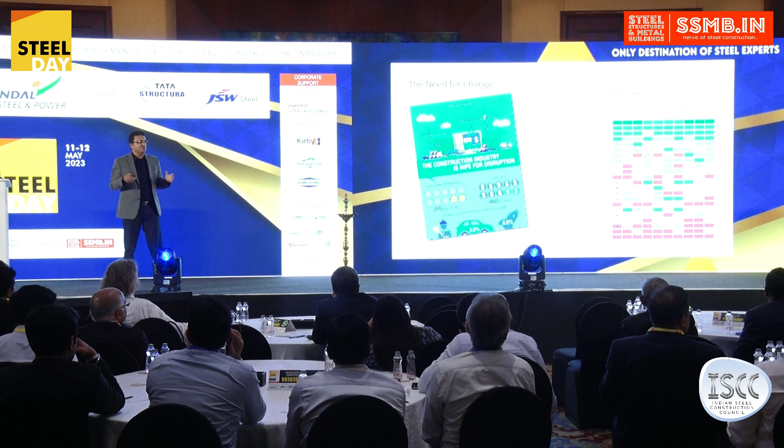So I wanted to quickly take a look at what we are doing as an AEC industry in construction and in design. All right, so this graph on the right-hand side shows various different industries and how digitally ready they are, right? If you see the IT sector and media and professional services, they are all on top. Green means you're kind of digitally ready, and red means you're not there. Orange is like, you're kind of getting there.

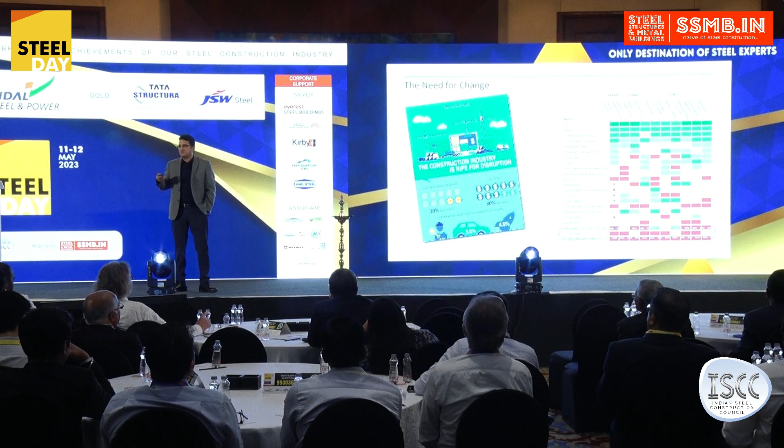This is from a few years ago, but if you see construction, it's second from the bottom. And the only thing below it is agriculture. And we know that some of these things have moved up. I know construction is also kind of moving up, like was mentioned. There's some things coming up. But there's a long, long way to go before we can think of ourselves as an AEC industry that is using technology as and when it should be used.

McKinsey had come up with a report, which on the left-hand side you'll see, that most of the projects typically take 20% more time to finish, and on about 80% of projects, I think, the budgets are busted. So there is a need for that, and the construction industry is ripe for disruption. And we've started moving in that direction, I think.

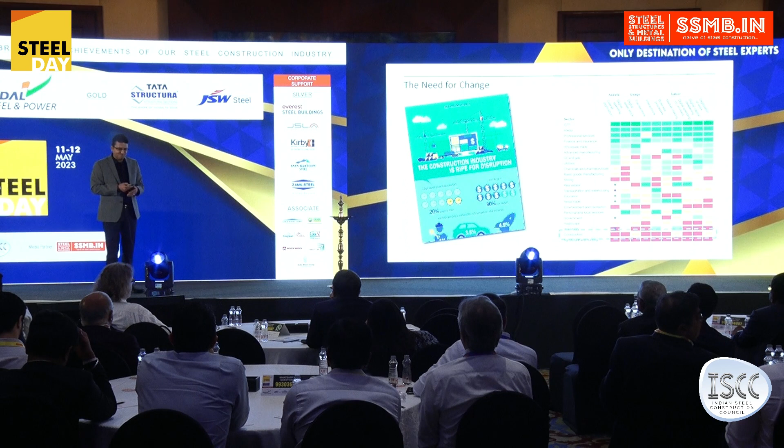This is a very interesting slide from the future of construction, put together by the Boston Consulting Group. There's a lot of things here that somewhere or the other we have started doing world over, maybe not everything in India yet: prefabrication, advanced building materials that we just heard about, 3D printing and additive manufacturing, autonomous construction, AR and VR that's being used more and more, big data, predictive analytics, wireless monitoring, connected equipment, cloud and real-time collaboration, and building information modeling.

So there's a lot happening here, but when it comes down to it, all of that depends on data. And data is where we, as design professionals, can bring value. If we don't have our data right, if we don't have our models correct, none of these other things could work. There's a lot of dependency on what we do. So I think the time is right to rethink how we design and deliver projects, and that's what I'm going to talk about today just a little bit. Being an engineer, I'm going to focus on the design aspect of it. We'll talk about construction a little bit later in the panel today as well.

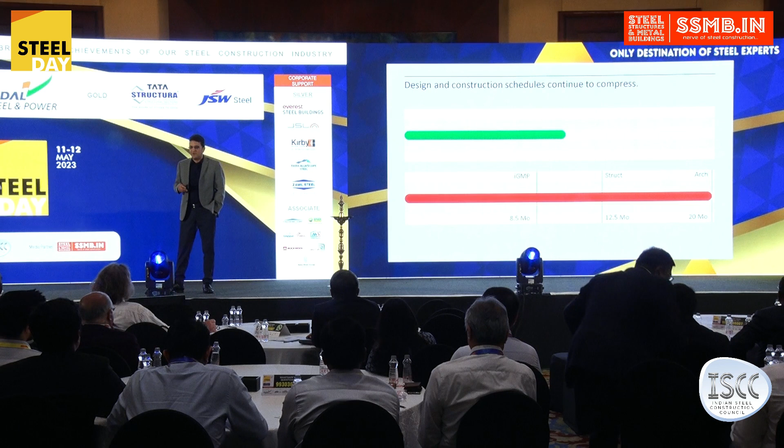Okay, so what is the need for it? These are two similar projects, very similar kinds of structures. These are stadium projects, both in the US. One had a design time of 20 months, and the other one half of that, right? This is just over a period of 5 or 6 years, and this is the kind of transformation that we are seeing world over. So what do we do in this case? If we have just half of the time, how do you deliver that project?

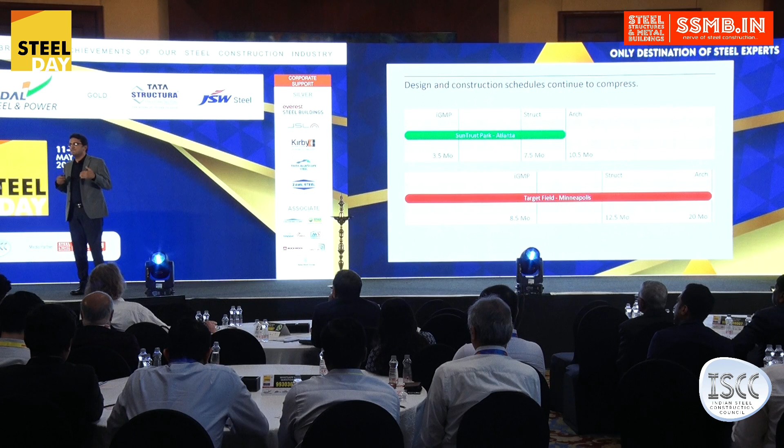So there's two ways that we can take, right? We can just do less stuff. We can give less information. We can have contractors figure it out or delegate it down the line. That's one way of doing it. But we would rather take on the responsibility and use data-centric modeling to take on additional responsibilities so that the risk is less. And that's what is supposed to happen.

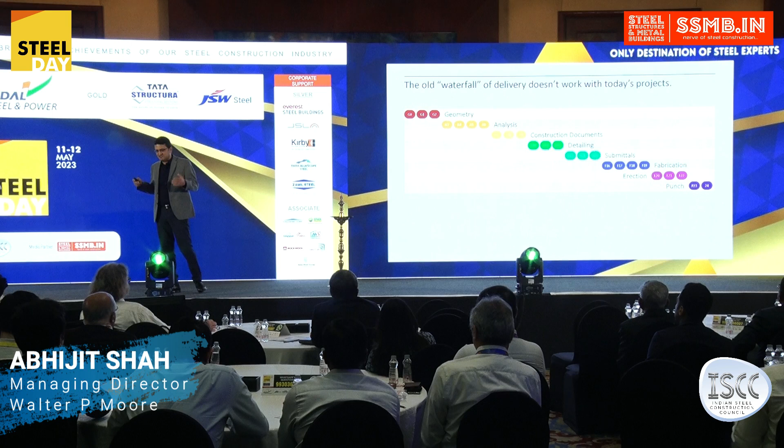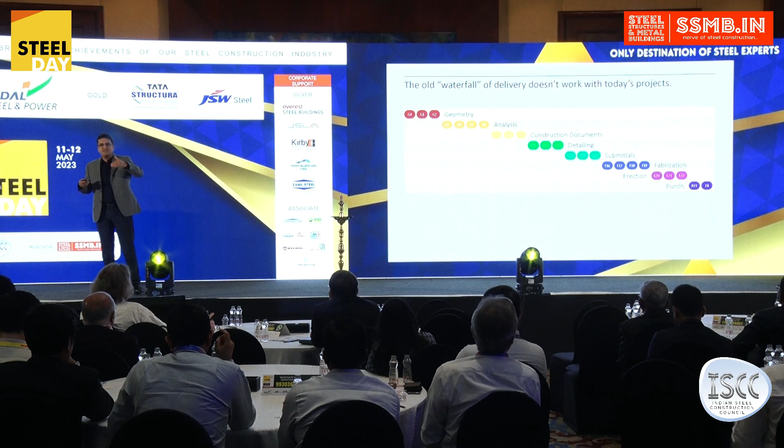So now we know the old waterfall way of delivering structure doesn't work with fast-track projects and where we are headed. Geometry being the first step, then analysis, construction documents, detailing, then the submittals or shop drawings, fabrication, erection, punching. That one-after-the-other approach doesn't work anymore, because all that leads to is an inefficient relay race, right? As design consultants, architects and engineers, we work in this one green box where we are doing our coordinated design.

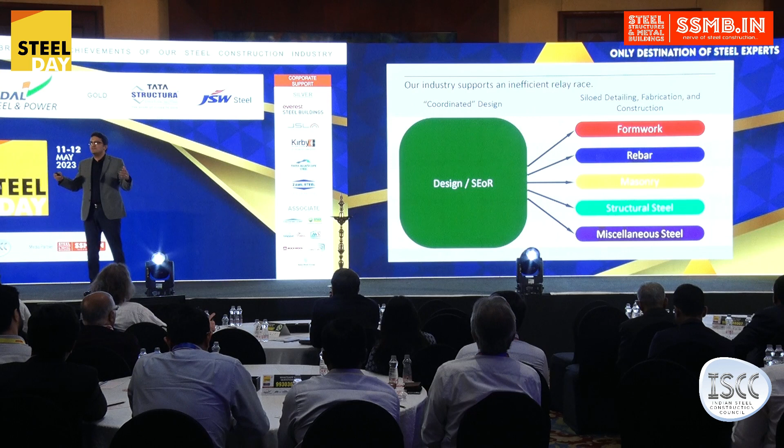And then when it goes into construction, we have all these other silos, like the formwork contractor, the rebar, masonry, steel contractors. They're all working in their own thing. And this is not even talking about MEP. So everybody is working in their own little silo, and the first time they come together is on the field when things don't match.

So that's why this digital approach or digital practice or data-centric processes are required. And there's a few different things: what is the need for that? So as was mentioned earlier, things are getting complicated, right? To address this complexity, there's more things that we need to evaluate in more depth. So optioneering is something that we have to do more and more.

To reduce waste, sustainability, I think the more optimized the designs are, the more we are reducing waste. Unleash creativity, give more control to ourselves, provide higher levels of fidelity and quality, and deliver consistently. It's not doing just something on one project. So these are the kind of things that require this thing called digital practice.

But what is digital practice, right? So we asked these questions to ourselves, what is digital practice? So the answer that we came up with within our firm was, it's a firm-wide approach to leveraging information using technology, helping our creative personalities turn knowledge, experience, and innovation into value. I know it's a mouthful, big definition.

But actually, when you look at it, a lot of these things are not important. If you take all the fluff out of it, what remains is it's just leveraging information using technology. And that's the critical part if we want to move into the next phase where all the other industries are already there. But more importantly, what digital practice is not, and this is where we all need to be careful. So it's not just blind application of tools.

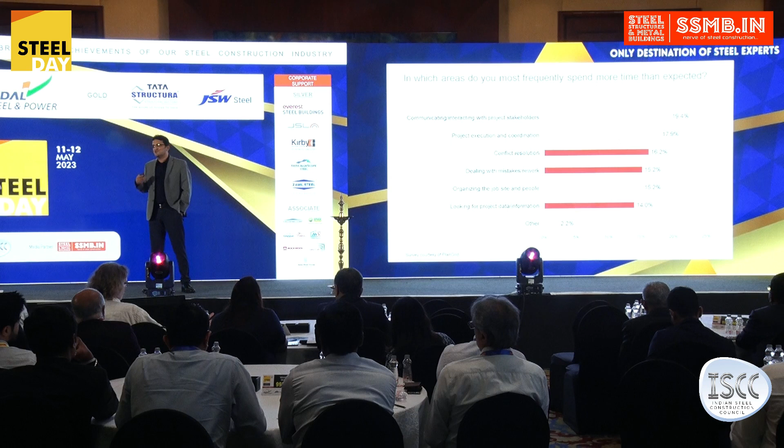So this should not be acceptable. Contractors shouldn't have to look for data, which is something that we should be providing, right? So the big question is, the contractor needs 100% of information to build a project. How much information are we providing as design professionals? So this is a question we can ask ourselves. And the answer, I think, ranges anywhere from 40 to 60% of the information. There's a lot of stuff that's still not being provided directly.

So if you look at it from this standpoint, if the information provided at concept design is, let's call it 0%, versus construction documents, hopefully everything is provided. But what happens is, when we do a 2D drawing handoff, there's a big cliff. There's a knowledge gap that happens there where all the information that is required from a contractor standpoint to bid the project correctly is not provided.

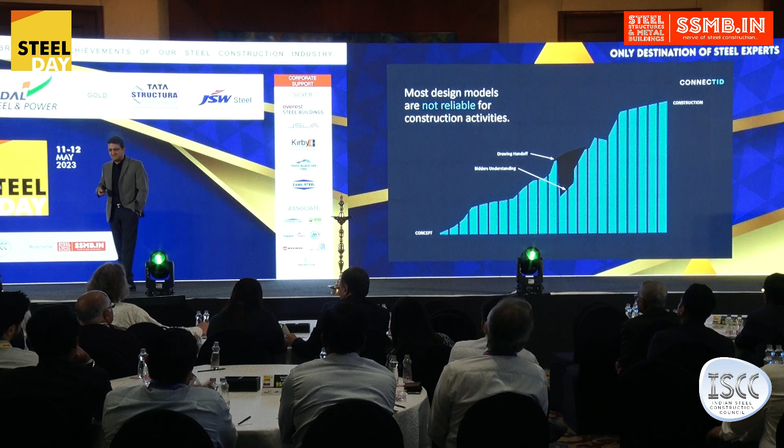So there's a big bidder understanding gap. It drops the information, then you have to go back, maybe ask for additional information or make assumptions, and that's why it increases the time and cost of projects. So how do we take care of this loss of data and knowledge?

So okay, I'm saying not giving 2D drawings. So can we do BIM? Yeah, but what are we actually doing when we say building information modeling? If it's LOD, or level of detail, at 100, basically you're just doing the space reservation.

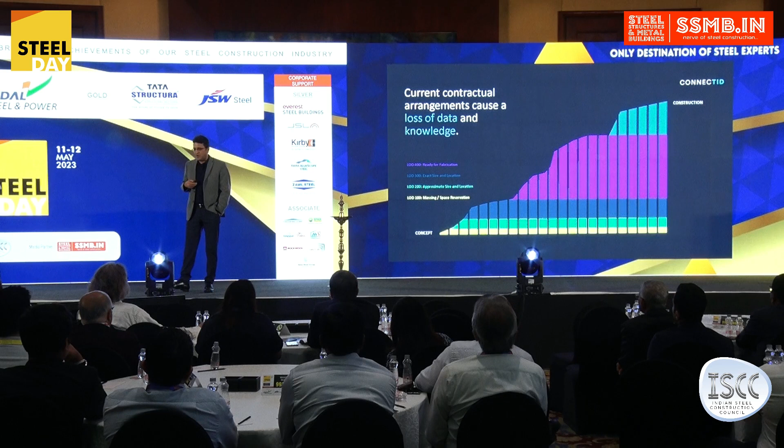LOD 200 is the approximate size and location, things like that. LOD 300 is the exact size and location. Okay, now we are getting somewhere. So that's the kind of information that will help the contractor. But the LOD 400, which is kind of a ready-to-fabricate model, is what is actually required. And LOD 500 is kind of the as-built. But at least providing that LOD 400 is what is required.

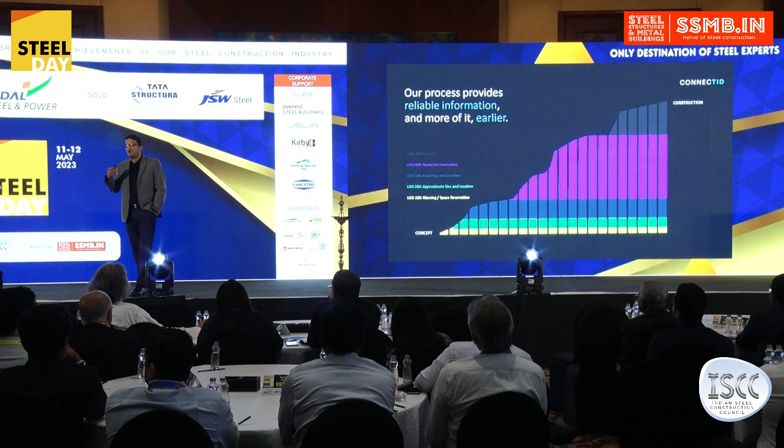And if you provide this information reliably and on time or before time, that's when there is no gap between the understanding of the bidder and the model handoff. And that's what I think our goal should be. So we looked at the traditional approach earlier, right, where the design is done, and then comes the detailing and construction services with RFIs and things like that. And then that's the completion of your design phase.

But what we are looking into with this data-centric approach is something that we are calling CONNECTID. So that's transformative integrated delivery. We say it's something internal, but a lot of the leading engineering companies have their version of this. So the design happens, and then there's an overlap phase where modeling and validation happens. And there is overlap between the two. And what that does is it's definitely leading into schedule savings.

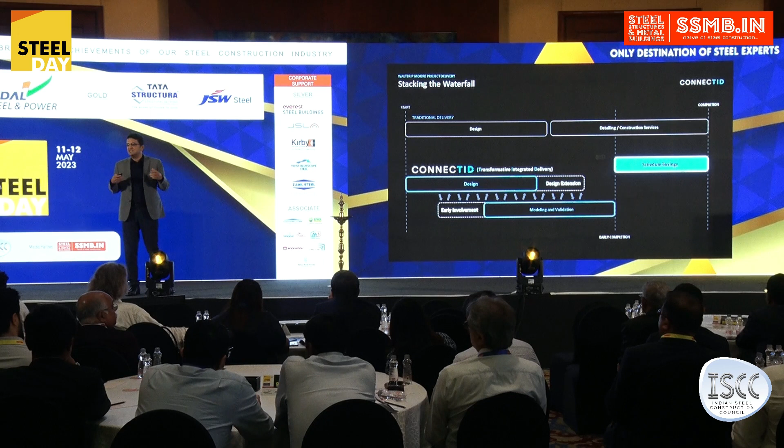Now you would say, okay, now you're actually cutting down on the design time, but there could be a design extension because this deadline is not going to move. And getting the modeling and the construction engineers who are doing the erection analysis and all those folks involved early on, there could be a lot more give and take of knowledge sharing between these two phases. And this is not drawings, these are models. So models can be created early, even a Tekla model created at a schematic design phase if we are using the data correctly. And that's what the goal is.

All right, so talking about models, we know in the project there's a lot of models, right? These are manually generated models prepared by different folks within the life cycle. There could be a parametric model used for defining the geometry, designed by architectural or engineering designers. There's an engineering model, could be SAP or ETABS, done by the engineers. There's a Revit model, maybe some draftsmen in the office putting it together, and there's a fabrication model like a Tekla model which steel detailers are putting together. But these are created in their own little silos independently.

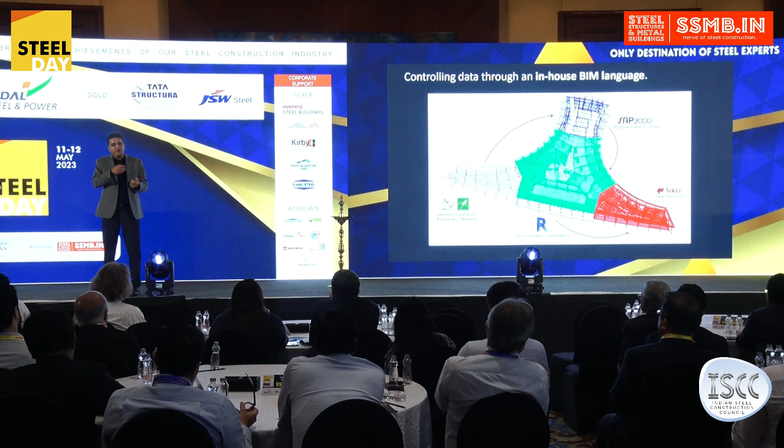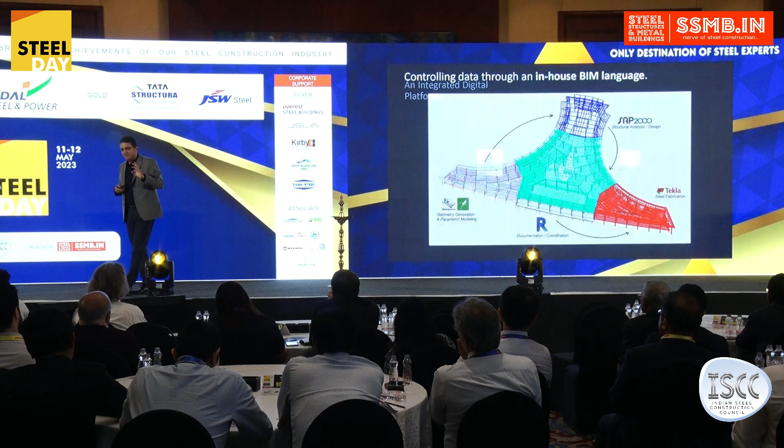I know there's tools that will transform from Revit to Tekla, Tekla to Revit, and so on. But what we are missing is there's so many other platforms that this information needs to go in. So if we look at Revit and Tekla, there's only two connectors. We have to be able to go from Revit to Tekla and Tekla back to Revit. Okay, that's good. But now you add the engineering models like SAP and ETABS, and now you need two more connectors for the information to go from SAP to ETABS, ETABS to SAP. Now you also want them connected to your Revit and Tekla model, so you need 12 connectors. Okay, that's still manageable, doable.

But now you add other stuff like geometric modeling, your Rhino and Grasshopper, your Navisworks, your Power BI tools, GSA, design fabric. So there's so many things happening. And now you have all this mesh of how the data needs to go from one place to other, right? And now you'll almost need an entire IT team just to manage your data on a project. So that's not ideal.

So what we've been doing is something called CID, and this is not the CID we are thinking about. Daya Tod Darwaza, not that CID.

This is Central Interoperability Database, right? So this is basically data which can be exchanged between all different kinds of models. And so everything is finally connected. And these connections are what help us actually go where we want to go, a data-centric process. You don't have to do the same thing over and over again. You don't have to go back and change your engineering model because the architect has changed something.

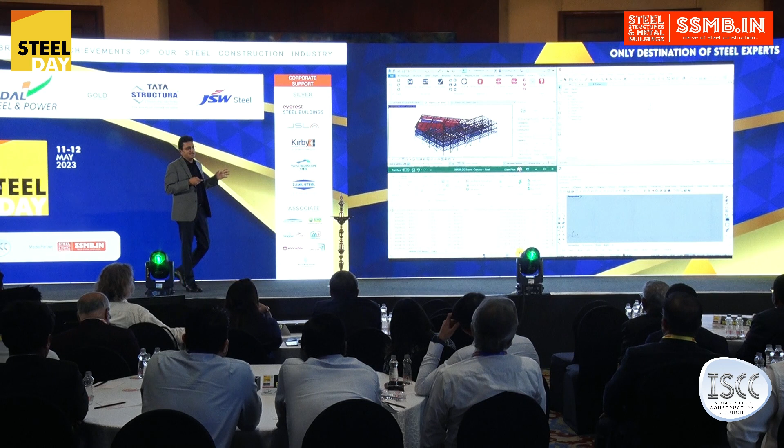So this is a small video of how this can work, and I don't think we have enough time, but basically, if you have a Revit model on your top left, you can get the information in this SID, it could be as simple as an Excel spreadsheet, and this information comes in. Now you can go into Grasshopper and Rhino, write your programs to get this information, make geometric changes if and as required, and then that moves into your ETABS model.

The ETABS model or SAP models or whatever your engineering models are, they design it, go back to your Revit and Tekla models and all those things get updated. So one thing here is this SID or any of these databases are not black boxes. They are open to all engineers so that data can be queried and reported in different ways, so it can be actually useful and not just doing cool stuff for the sake of doing it. So I'm gonna move on.

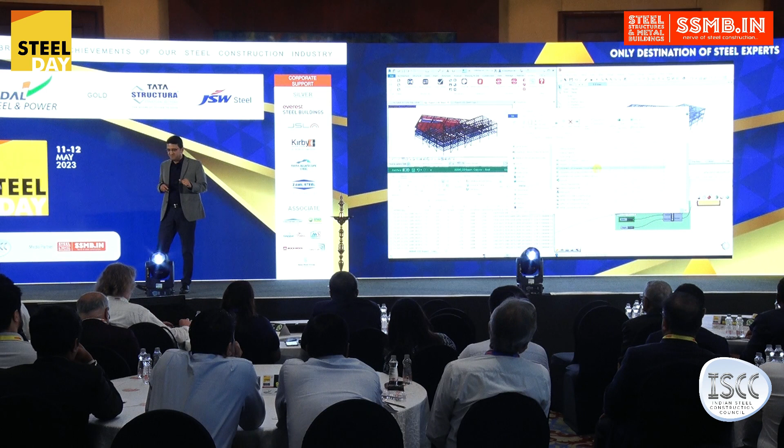What these SID exports can also do is give you a snapshot to track quantities and what was happening at different stages of the project, how the quantity changes or reduces, whatever the case may be. And the other important aspect obviously is sustainability. Are we able to leverage this information, this data, so that we are able to be more sustainable? Are we able to do that?

So what we can also do, since we have really good quantities, if you add in the right factors, we can actually come up with the embodied carbon, not only overall on the project, not only just concrete and steel, but different grades of concrete, different types of steel, your rolled sections, your tubes, your deck, how much carbon is consumed in all these different things. And this, to me, is really important.

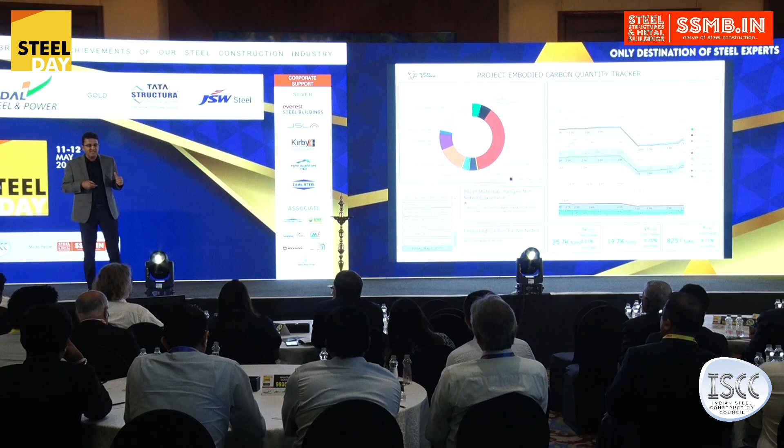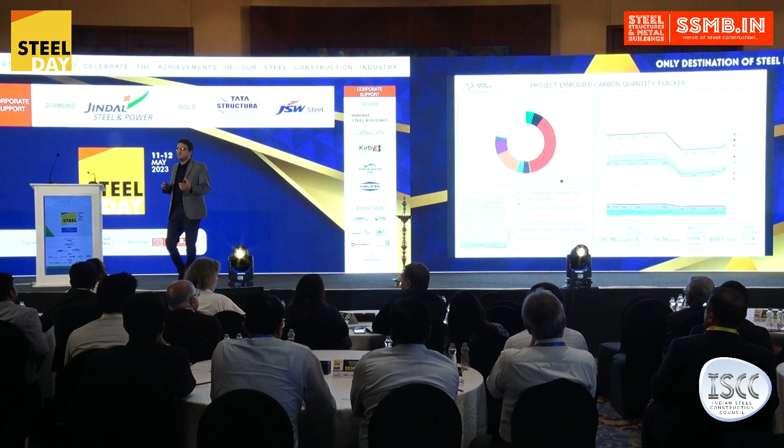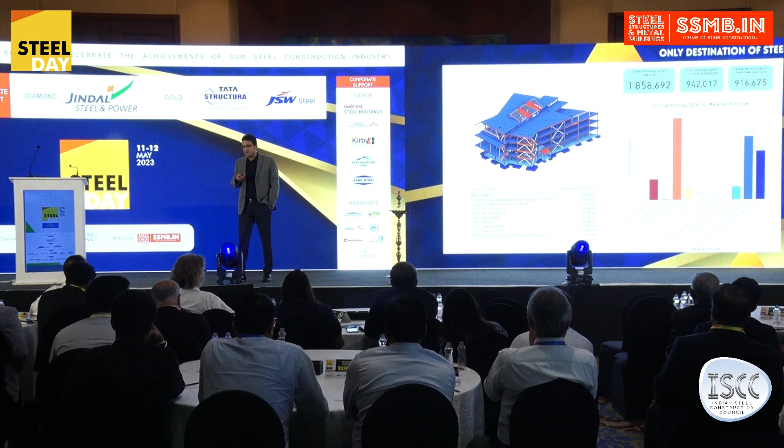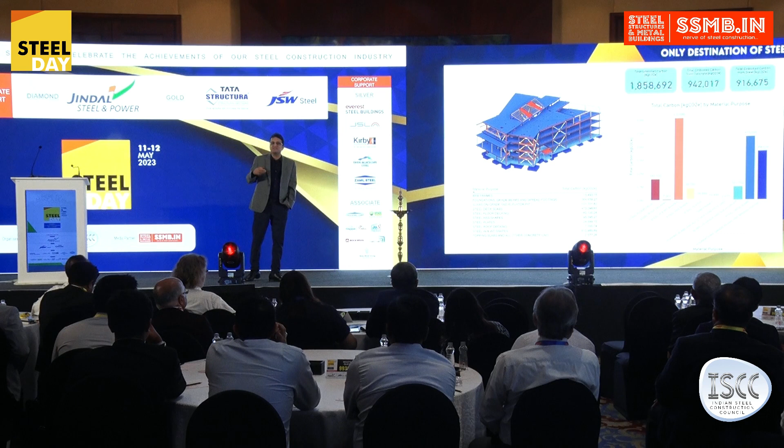So decisions that the project teams, from the owner on down, everybody can make based on how much embodied carbon is being used. It's not only about steel right now, but this is something that we should all be striving to do. Another example of that, same thing, a steel composite structure, and the total embodied carbon, how much was that? What's the contribution from concrete and steel? You can see, if you actually want to make a substantial change, then the steel WT sections and shapes, that's where you need to make the change. So these kind of design decisions can be made early.

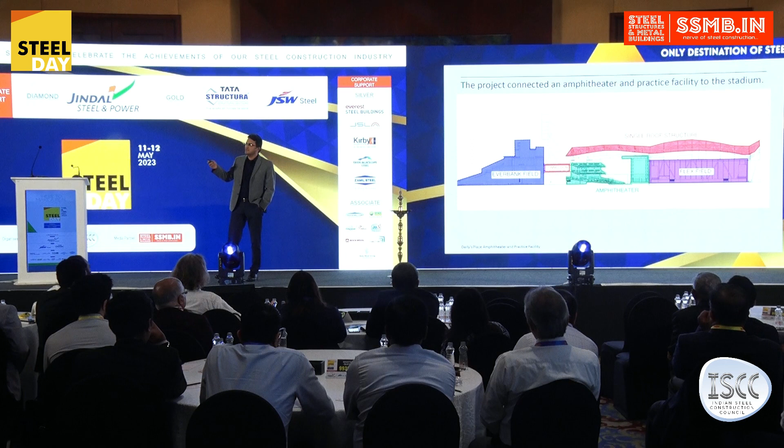All right, so I'm going to take a few more minutes to talk about, is this all just theory or are there actually projects where we are doing this? I'm going to start with a quick project in Florida. It's Daily's Place, the Jaguars practice facility. I'm going to go a little quick here for shortage of time. This is an amphitheater practice facility connected to the stadium, a roof structure, where Populous was the architect. They came up with the design. Different options were considered, and then early iterations of primary structures were done.

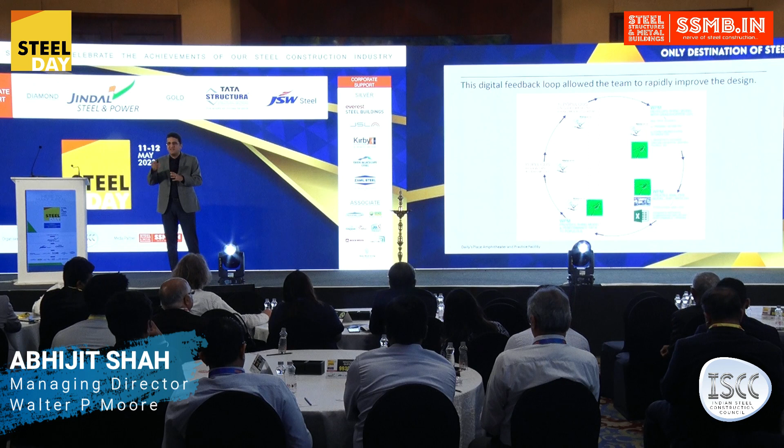Now you go back and forth. This is kind of the old way of doing it, which is also important, and happens across the table. But in what I'm calling the feedback loop, this is where the data actually becomes very important. Populous, in this case, started with a baseline Rhino model. And okay, this is what is required to be done on this project. Then we develop a Grasshopper model and do some sensitivity studies. Okay, these are the areas, what kind of structure is going to be required.

And then push that into a SAP model where we actually run the designs, and then again push that into Grasshopper and Rhinoceros, which are the parametric modeling tools, and give it back to Populous where they can actually review that and say, okay, this looks good, we need to make these changes. And this is a continuous feedback loop. And this is not exchanging drawings or models. This is happening in real time. And that's where I think the value is.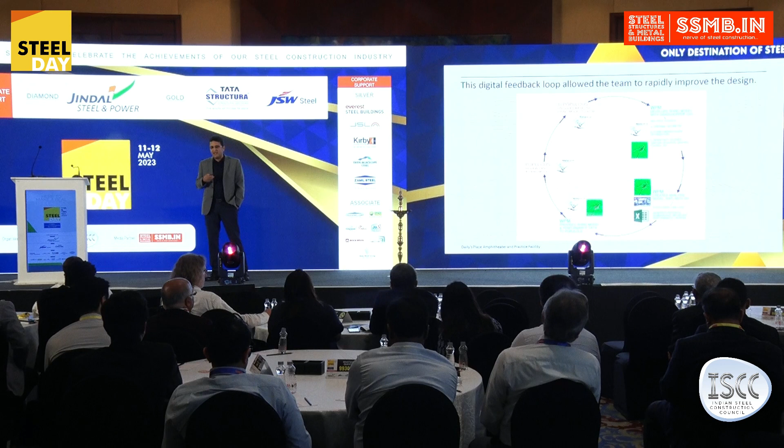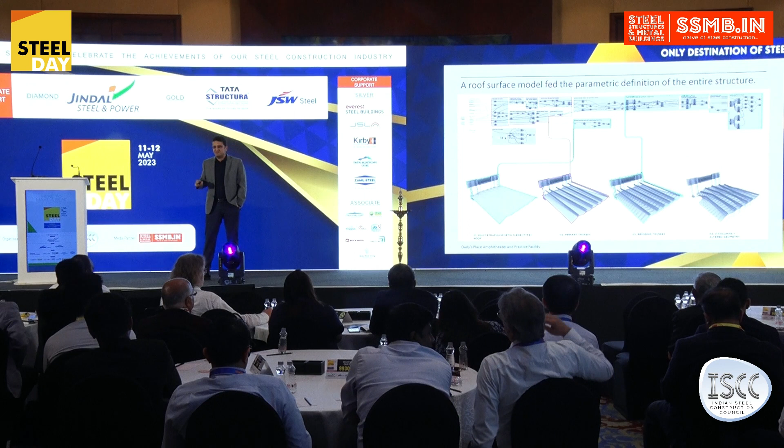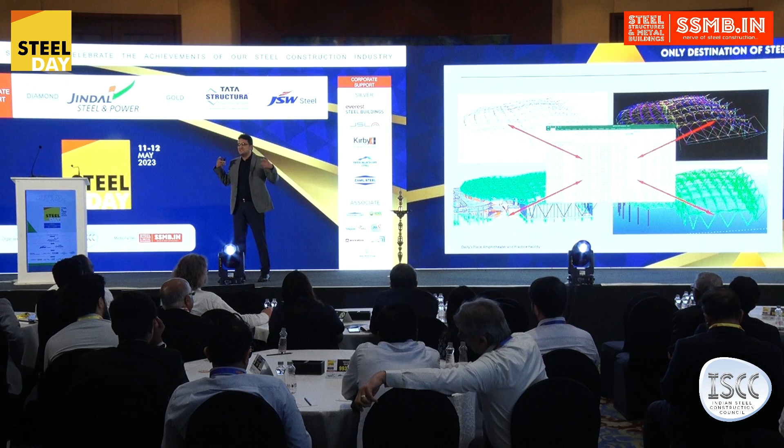So you kind of start with a parametric definition of the entire structure, and in this case it was a PTFE roof, and then the primary trusses, bridging trusses, and the columns that are required, all kind of created digitally. You're using the right tools for the right purpose. For the primary steel, maybe Rhino or GSA, SAP, Revit. So all these different models are created, but they are all created and connected through this SID. So the information is in one central database which collects all this information, so that they are all connected. We're not independently doing things and then trying to verify whether it works or not.

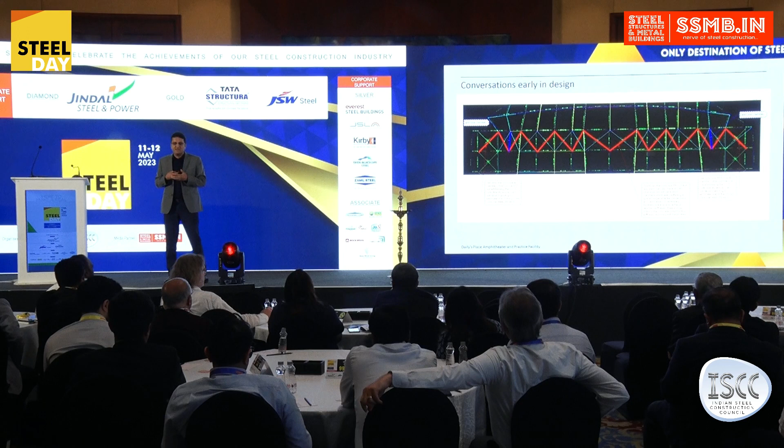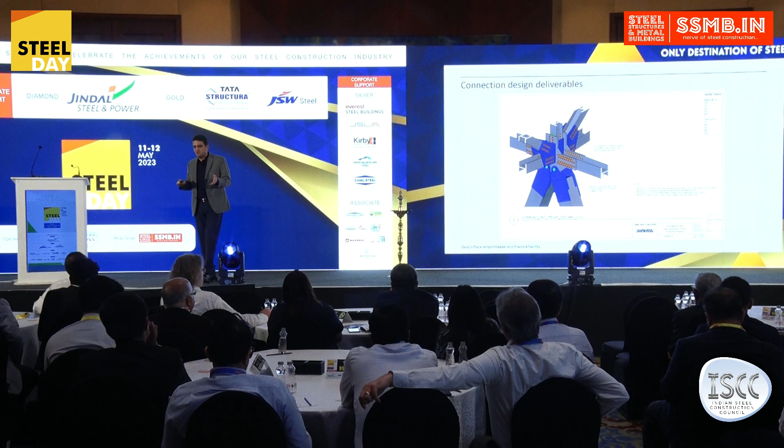You can also look into construction, where are the shoring towers going to be? All that also can be incorporated in this process. And as a result, on this project, there was not even a single RFI that was created. And it was delivered before schedule, before time.

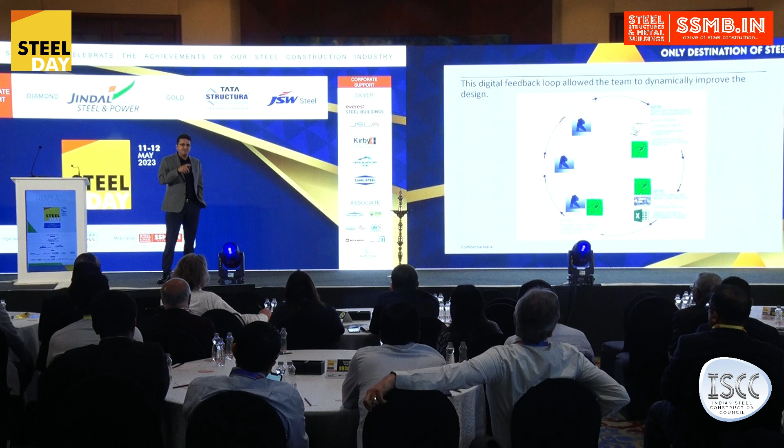Okay, so are we able to do things like this in India? Yes, we are. So we actually completed an arena project, a confidential one, where again Populous was the architect. Similar loop. Instead, the starting point on this one that they used was Revit. So we were able to bring value, go back to Populous, and these iterations take place. This is a small kind of solver. I'm just going to show it.

Hopefully this works. Yeah. So this is a very, very simple solver that I'm showing right now in parametric modeling, how manually for design of a truss you can change the depth and shape and number of bays and all those kind of things. But then you can add parameters. Okay, my sight line is going to be affected from here. So what are the different things that can be done? And the program can actually design all these things. If you add Karamba as another tool to it, you don't even have to spit it out to a software like SAP, but it designs internally and then comes up with a solution that really works.

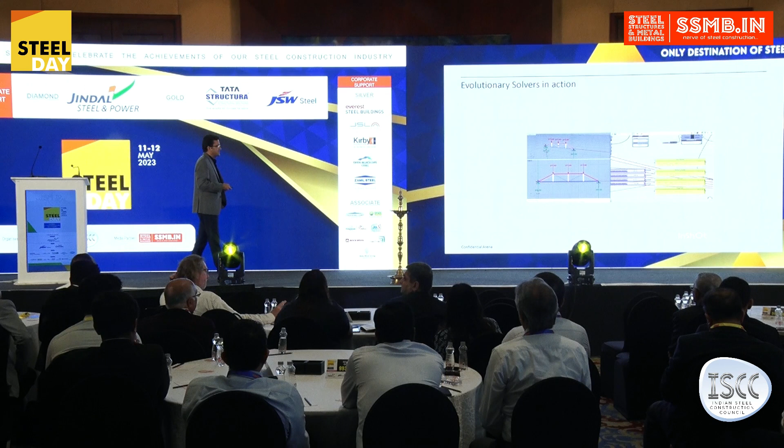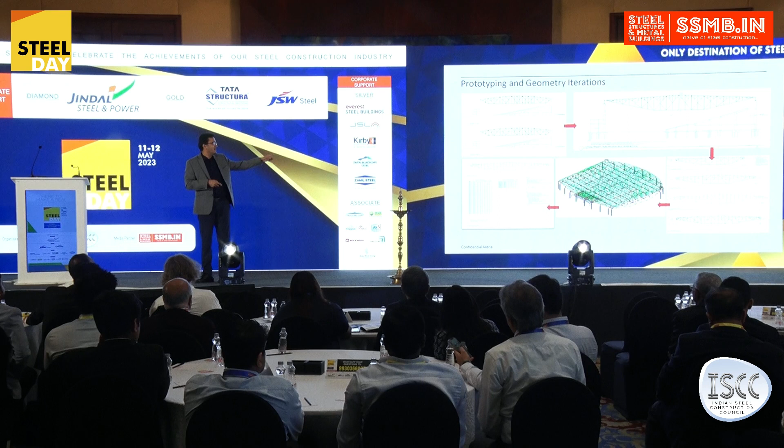So this obviously is not what the truss looks like. This is what it looks like. On the left is where we started from a sight lines perspective, how it changed, the various iterations. Unfortunately, on this project, because of the contractual relationship and what our scope was, even though we had a model, what was delivered was just 2D drawings. So this is what we need to change.

And is this only good for big structures like stadiums? No, obviously not. This is a composite steel design building structure where the quantities starting at SD level can be tracked at different portions, the concrete, the shear walls, steel. In steel also, the quantities for columns, braces, beams, deck, trusses, everything can be tracked starting at SD level. And the important thing here is you can do that comparison, what was at SD level and what was at the GFC level.

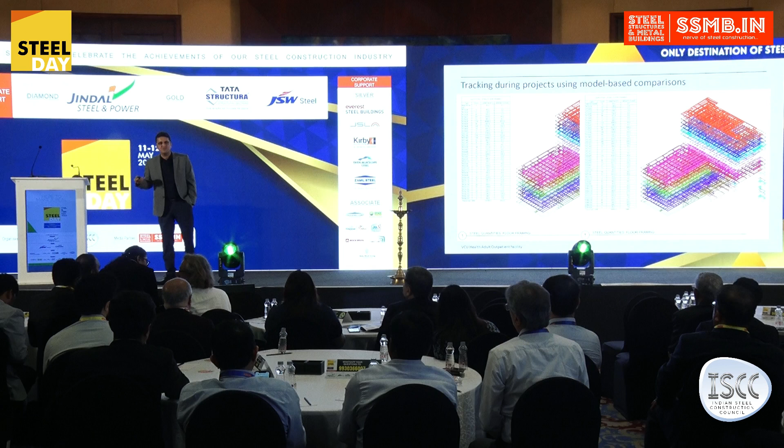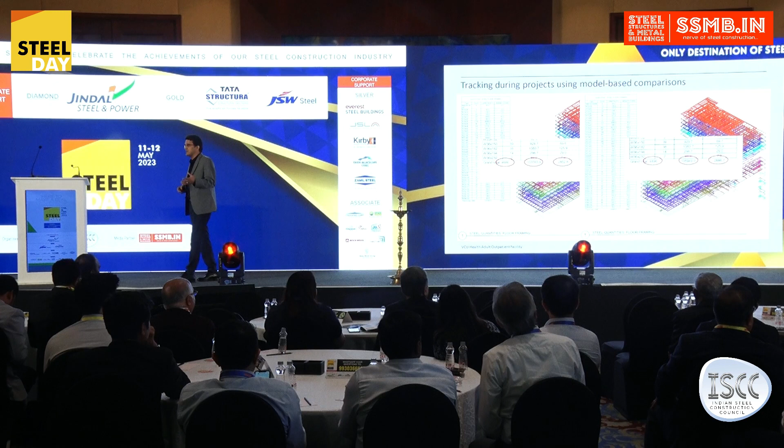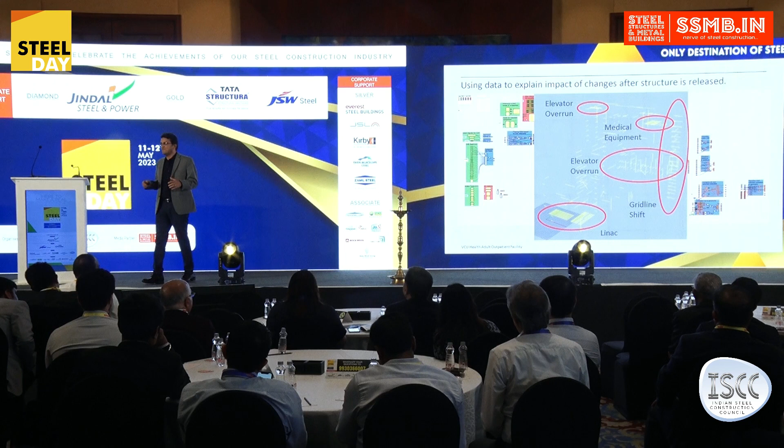So we need to be able to use this data, not just do stuff for the sake of doing it, but it has to bring value, and this is one way of doing that. And it can be represented in a Power BI report showing what things changed, and so on and so forth.

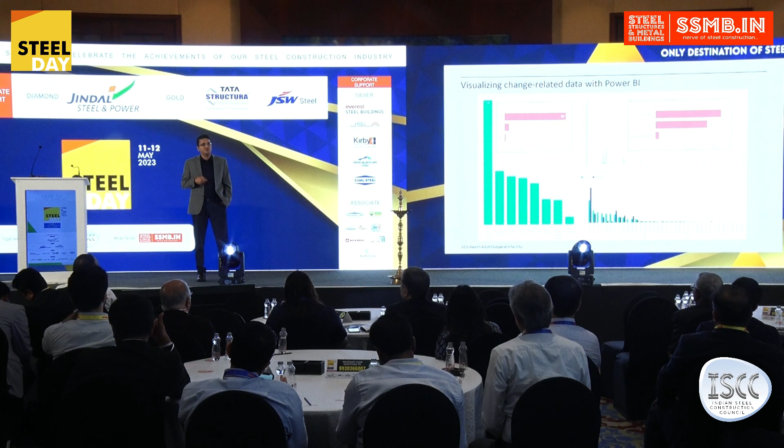All right, I've been talking quite a bit. So wrapping up.

So what I want to get at is, we know how we do things the old way, and what's the new way. So what we need more than data is a change in attitude. We need to think of ourselves as something different. We can't just say that we create drawings. No, we don't even create models. We create data. That's the thought process we should have.

We shouldn't think our drawings are accurate enough, that the contractor will be able to build from it or something like that. No, we can't have that attitude. Our models need to be machine readable and fabrication friendly. That's kind of where we are headed.

We work with our software. No, this isn't about the specific software, but the software required by the client, or whatever software is required by your other project delivery partners. So that's what we should be thinking about.

To me, this one is really important. Sharing information is risky. We used to think 10 years ago, okay, I'm going to share my model, and they're going to use it and see your model had something different, and now you're making a change. I think not sharing the model is risky. We should be working as a team, so not sharing information is where the risk is. We should be risk averse in that case.

Rather than thinking of ourselves as structural engineers, think of it as an integrated team which can solve the project's problems in a virtual way. So that's where I wanted to talk to you about.

So what's next? Well, somebody said ChatGPT earlier, right? I know everybody in the room knows what ChatGPT is. Do you think ChatGPT can design a building? Show of hands. Maybe two people think so, maybe people think it's 5 years away. It's happening right now. You can actually say, I want to design a 3-story building, C-shape, these many levels.